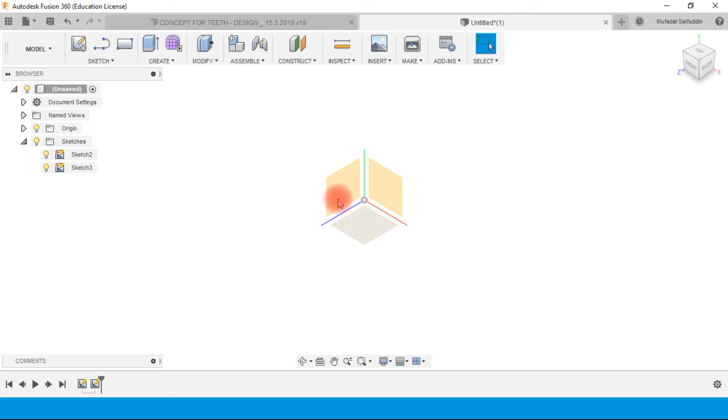So I will take you through how to do it in Fusion 360, and with that we can basically form the concept of the jack. So let us start making the parametric sketch. So I have opened up Fusion 360 and this is the model workspace. Under the model workspace, these are the planes on which we can sketch, and I'll be creating a sketch on one of these planes. Go to create sketch, select the plane.

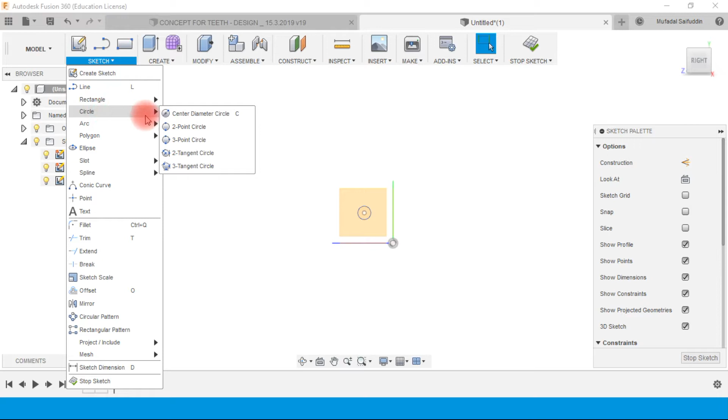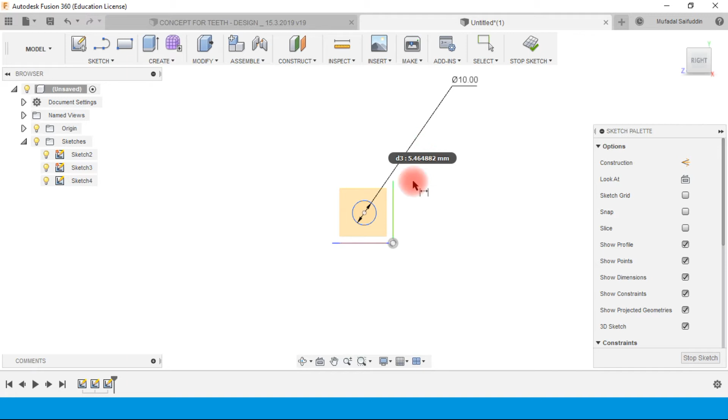So the next thing I'm going to do is place the points where the pins are going to lie. So I'm going to just arbitrarily place these circles. I've selected the circle option under the sketch drop down, center diameter circle, and I have placed a circle over here. Now to give it a dimension, I'll press the hotkey D, which will bring up the dimensioning option, and I'm going to dimension it as 10 mm. So the units are in mm. So the diameter of this circle is 10 mm.

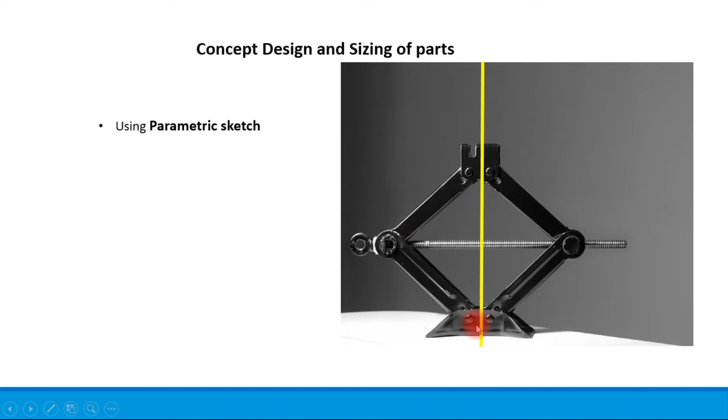And what I'm going to do is make a vertical which is starting from the origin. Why I'm making this is the jack design is a symmetric design. So you can see over here, this center line is the line of symmetry. If you see the left hand side and right hand side of the jack, the link is a mirror image. So I can just design the sketch on one side and just mirror it.

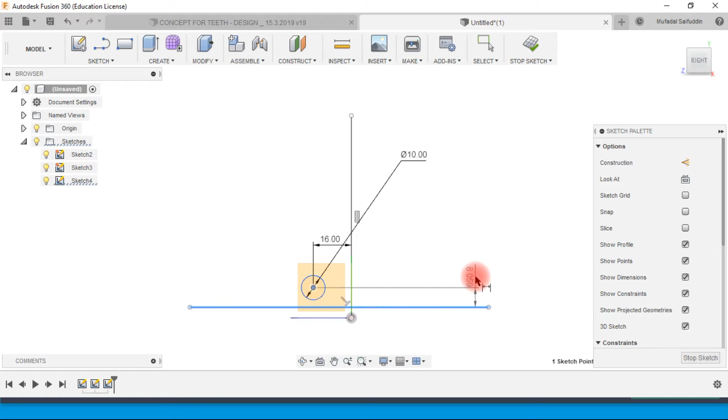Now I will dimension this pin with respect to the vertical. So let us keep this distance as 16 mm. And one more line which I am going to draw is the line for the ground. This line will denote the location of the ground. And from that reference point, I will dimension this point to a distance of 27 mm. So this is an arbitrary distance which I have kept as 27 mm.

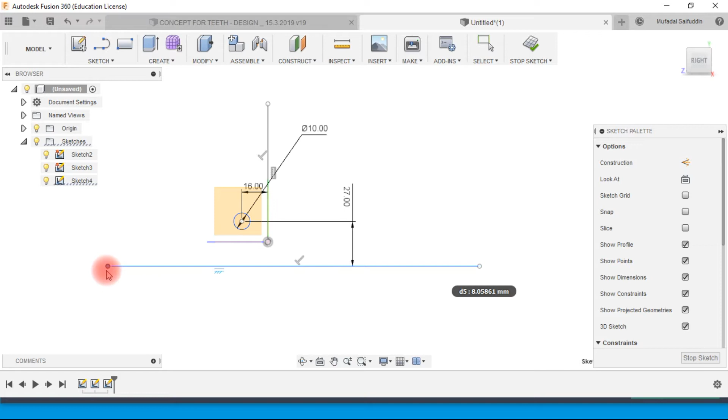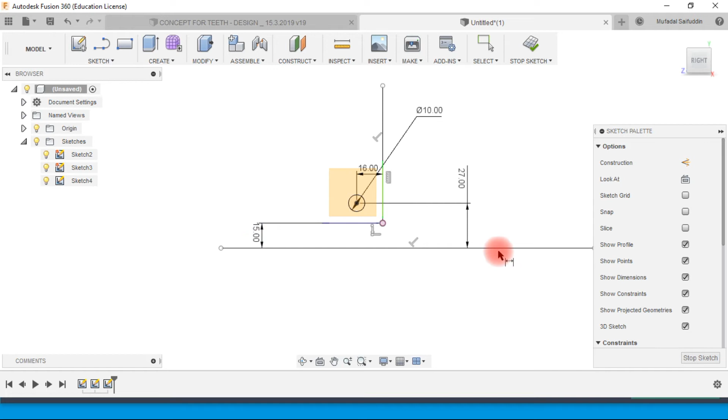And I'm going to dimension this line, that is the ground line, the line which denotes the level of the ground. I'm going to dimension this line with respect to the origin, and it would be 15 mm. And now you can see that the line has become black. That means it is fully constrained. So this is the ground line. This is the center vertical line. Now I'm going to go ahead and start designing the linkage.

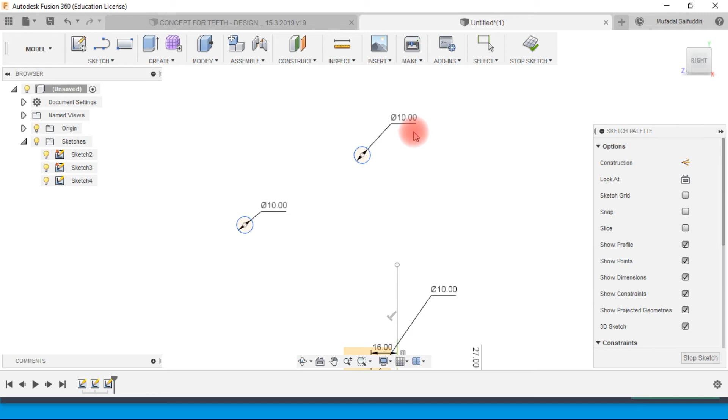So I'll just place another circle somewhere over here, with the same diameter as 10, and one more circle over here, which has a diameter of 10. So basically this circle denotes the pin for the top bracket, this circle denotes the pin for the bottom bracket, and this is the pin through which the lead screw will go. So these are the three pins on

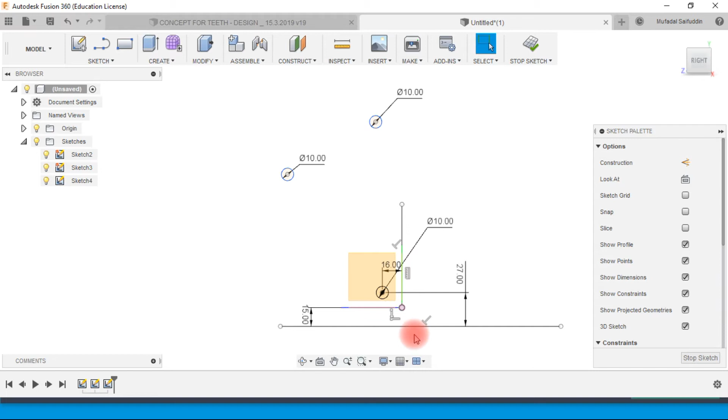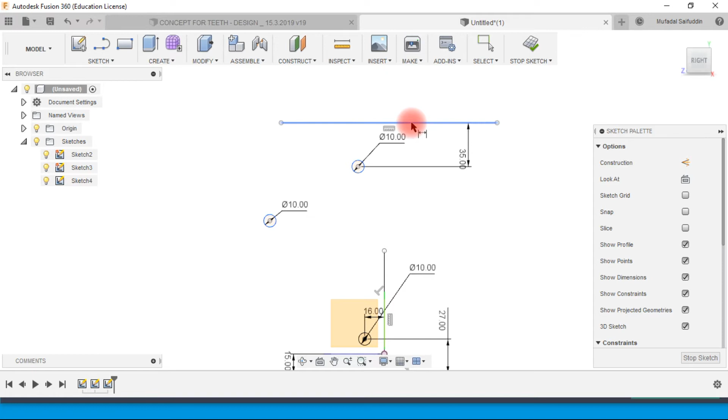half of the jack. Now, like I did for the ground level, there will also be one more level at the top, which denotes the topmost face of the top bracket. So I'll make another line for that. That line also will be purely horizontal, and it will be at a distance of say 35 mm from the topmost pin. Let us keep it at 35. So this is the line at which the body of the vehicle will rest. This is the topmost surface of the top bracket.

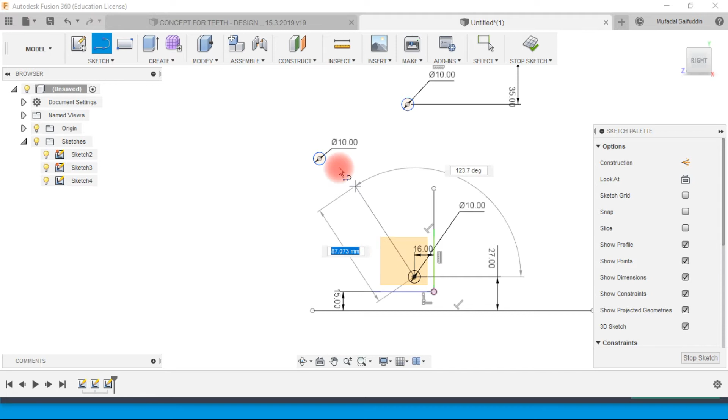Now the next thing I'm going to do is connect these circles with lines. So use the line command, select the center of the circle, connect them. Again use the line command, select the center of the circle, connect them.

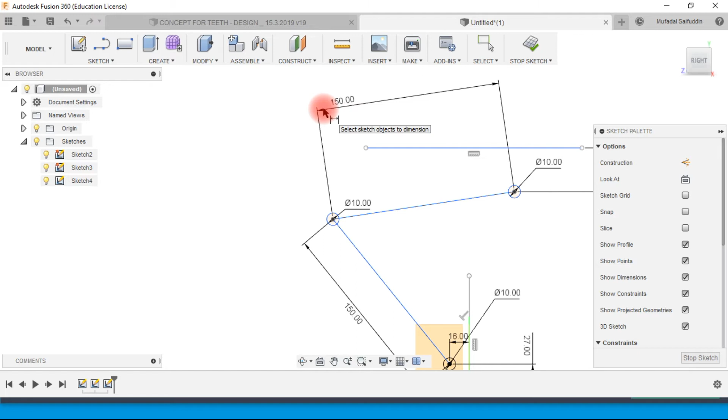And this distance, the true distance of this line, I will keep it at 150. True distance of this line, again I'll keep it at 150. Okay, there is a missing dimension over here which I have not defined, that is this 16 mm. So because of that the circle has moved over here.

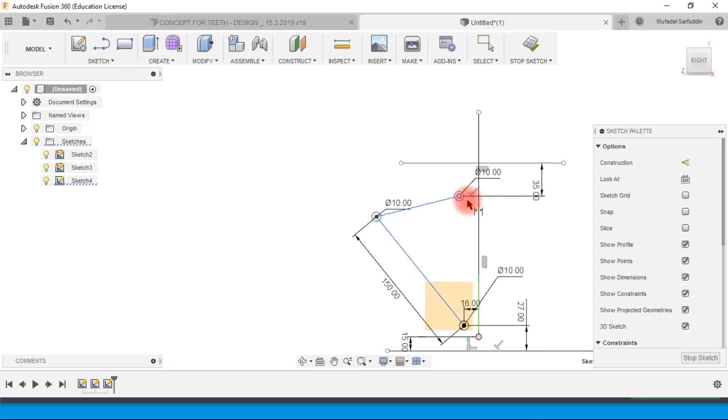I'm just going to do undo, and I'm just going to extend this center line, and I'm going to dimension this circle from this point as 16. So now this is constrained, and now I will dimension this as 150. So as you can see over here, it has gone up. So this 150 and 150 is basically the length of the link.

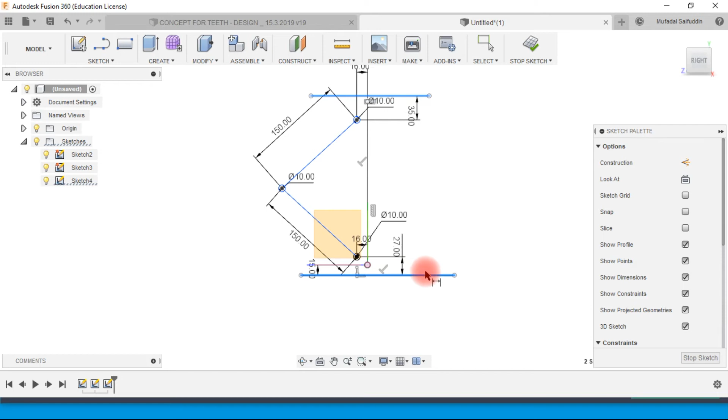And the final dimension which we need to define is this one, the dimension between the topmost level to the ground level. If we define this dimension, you can see that the whole sketch gets constrained. The whole sketch gets constrained because of defining this dimension.

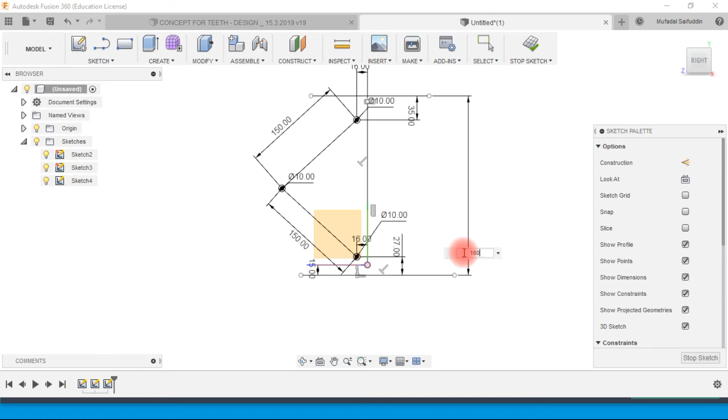Now by just changing this value, you can change the height of the jack and hence the orientation of the links. So if I put it at 160, you can see how the orientation of the links change. Again, if I put it at 262, you can see it is in the raised condition and the orientation has changed. By making this sketch, what we have done basically is we have sized the different components of the jack.

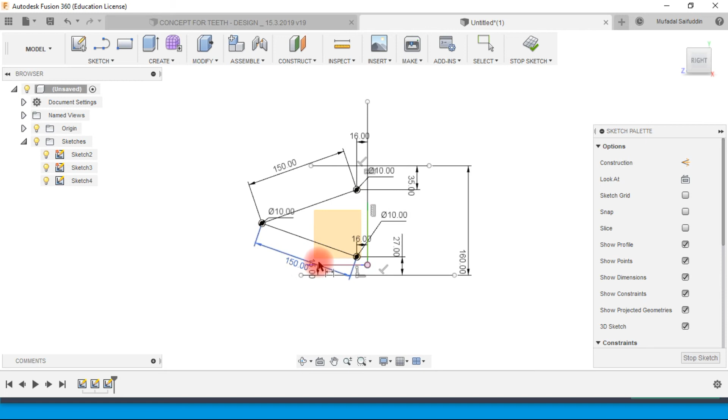So you can see over here we have laid out a dimension as 35 from the topmost pin to the top level, which actually specifies the size of the bracket which will come there. And also this 27 mm from the pin center to the ground also specifies the height of the bottom bracket. And this 150 specifies the length of the linkage. This 10 mm specifies the size of the pin, and this 16 mm specifies the distance between the pin to the center line of the jack.

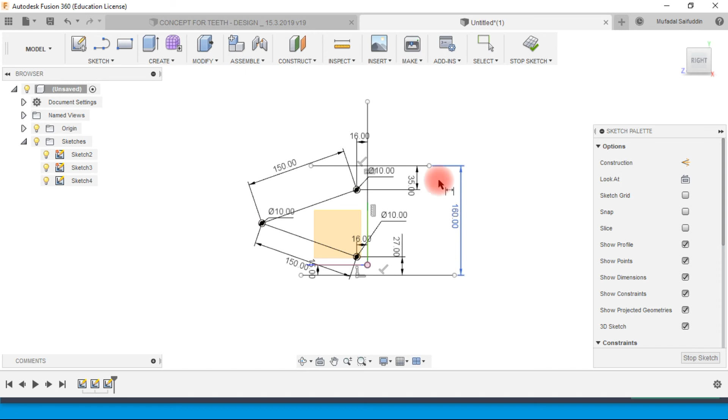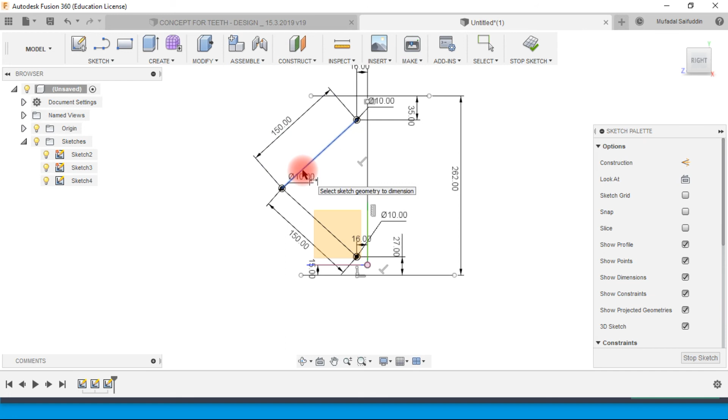So we have specified multiple dimensions using this parametric sketch, and also we have made it in such a way that it can be used to simulate the various conditions the jack can be operated in. So at the condition in which it is inserted, that is the ground clearance 160 height, this will be the orientation of the linkages, and when it is raised to the maximum height of 262 plus 102, this will be the orientation of the linkages. So all of this information can be obtained from this parametric sketch and is useful for better understanding the design.

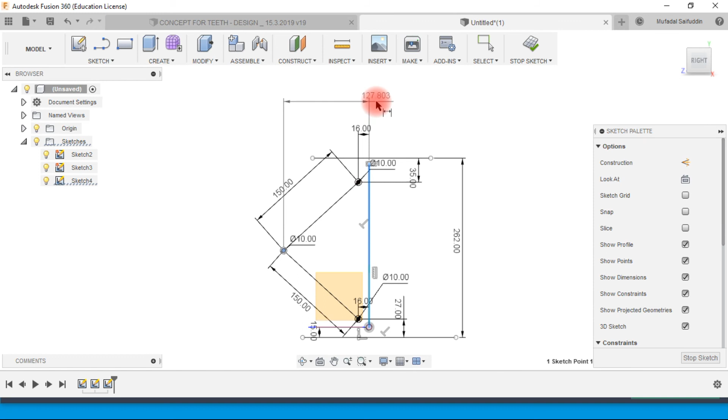Another important dimension which we can obtain from this sketch is the length of the lead screw which is required. So if I just use the dimensioning and get the dimension between this pin and this center line, I will get a dimension. Although I do not want it to drive the other dimension because it is already constrained, it will show me an error over here. So I'll make it a driven dimension, that is just for reference.

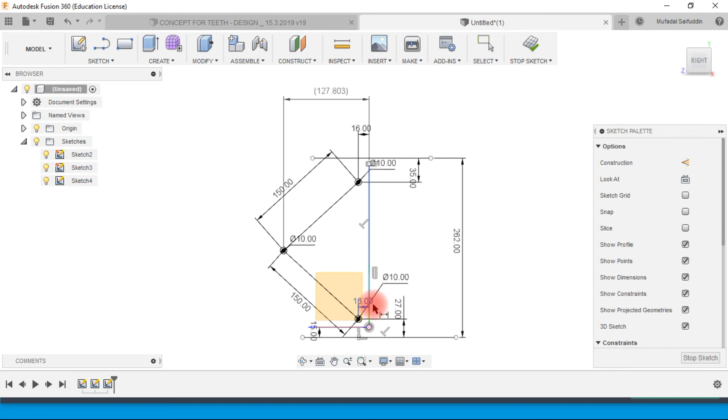So you can see over here, this is the length of the lead screw from this point to the center line of the jack. And if I am changing this value, the length of the lead screw will change. So we can see over here the length of the lead screw from this line to this point will be higher at lower height of the jack. This will be useful for sizing the length of the lead screw as well.

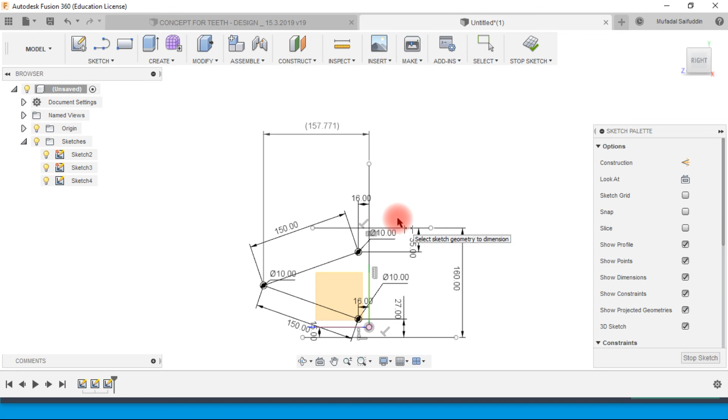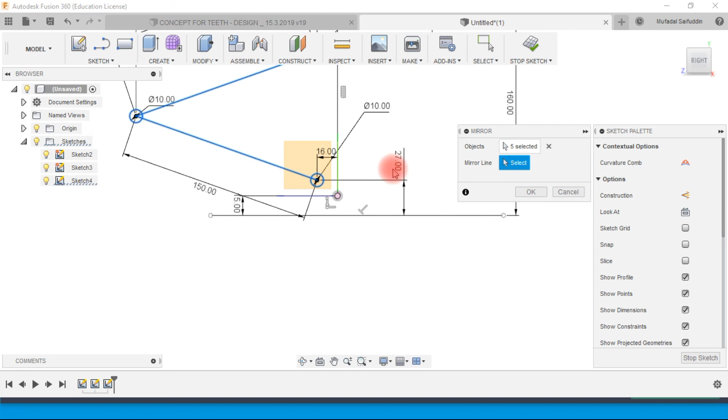The final step over here would be to symmetry this sketch on the other side of the center line. So I'm going to select these two points right here along with the circles, control select all of them, and go to sketch, go to mirror. 5 are selected. As you can see over here, the ones highlighted in blue are selected. Select the mirror line at this line

and press OK. So now by just changing this value, you can see both of these will change. And so this gives a complete picture of how the jack will behave with respect to the different conditions.